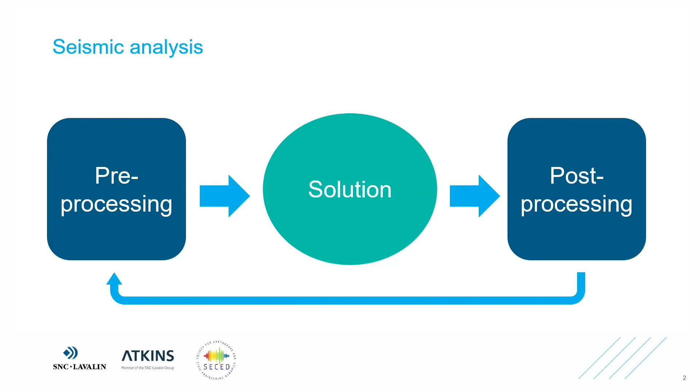Finally, if we then find something is not quite right in the post-processing stage, we might have to go back to the pre-processing stage and redo the whole analysis. But that's another topic. So what is post-processing then?

Well, typically, what we aim to do with post-processing is to extract action effects. And what do I mean by action effects? Well, I mean anything that is an effect of the static or seismic actions that we have applied to the structure, such as displacements, internal forces, stresses, reactions, and so on.

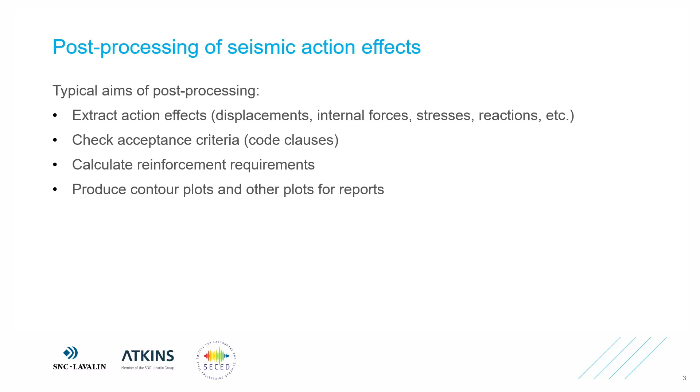You might want to check acceptance criteria. So often we refer to code clauses, for example, Eurocodes, to check if those action effects that we've extracted are within the permissible limits. We might want to calculate reinforcement requirements for reinforced concrete structures. We might want to produce contour plots or other plots for our reports, extract data for validation purposes, and compute in-structure response spectra for qualification of plant and equipment.

And in this presentation tonight, I'll focus on these two bullet points I've just highlighted on the screen, acceptance criteria and in-structure response spectra, as I think they're the most interesting. So in the first part of the presentation, I'm going to talk about how we go about checking those acceptance criteria. And then in the second part, I will talk about in-structure response spectra.

This whole presentation, incidentally, is based on a presentation I gave not long ago internally within Atkins, which was more aimed to be a training seminar for our younger and more junior engineers in the company. I've beefed it up a little bit, however, and I'm providing a few additional perspectives. So hopefully it'll be of more general interest for everyone in the audience.

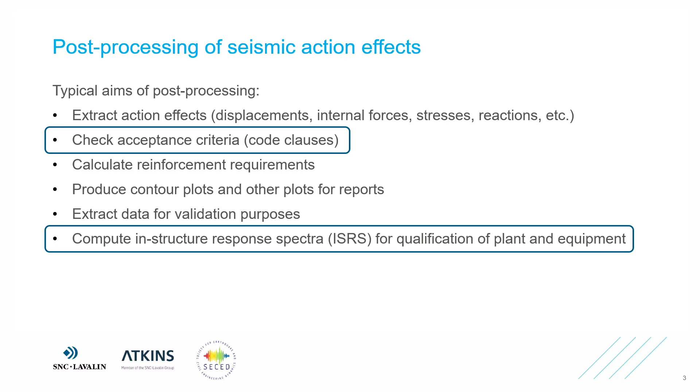Okay, so acceptance criteria. Well, I've put here on the screen two very typical acceptance criteria, which you might recognize. The first one verifies that the design bending moment is less than the bending moment resistance. And the second one verifies that the design shear force is less than the shear resistance. And I think both of these examples are taken from Eurocode 3.

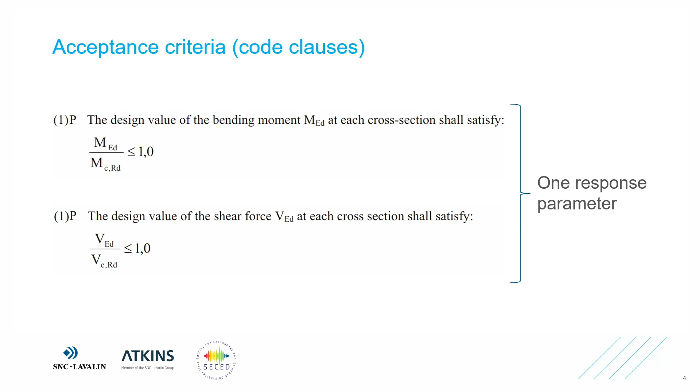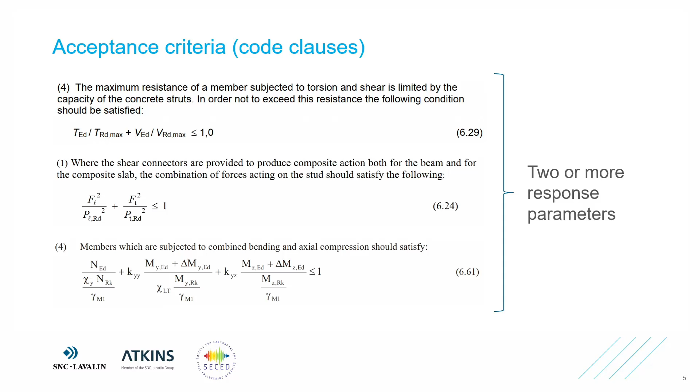And each example really only considers one response parameter: in the first case, bending moment, and in the second case, shear force. However, we also have acceptance criteria that involve two or more response parameters or action effects. For example, the first one on the screen is a check of combined torsion and shear. The second one applies to the forces within a shear stud. And the third one applies to the combined effects of axial force and biaxial bending moments in a steel column or steel beam.

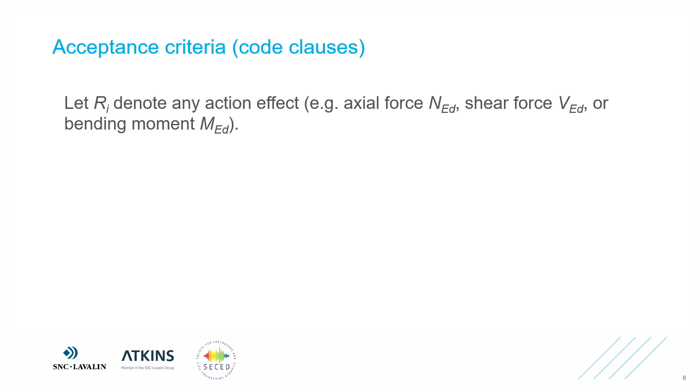Now, all these acceptance criteria had something in common, and I'm going to draw out now what they have in common. It will involve a little bit of math, but hopefully it won't be too taxing. So by R, I denote any action effect. It could be axial force, shear force, or bending moment. Then for M coincident action effects or response parameters, a generalized acceptance criterion is, as you can see on the screen, a tidy little mathematical equation.

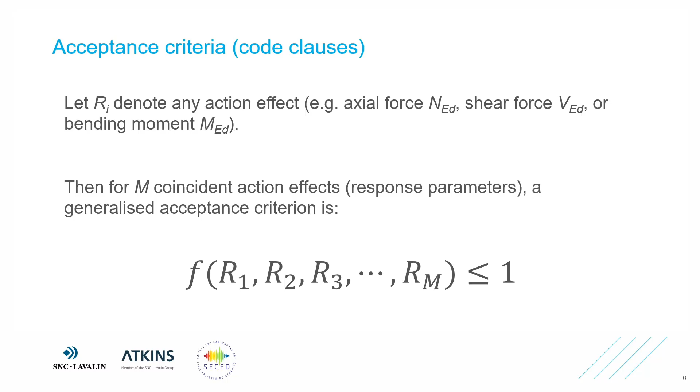We have a function of our response parameters, and that function, generally speaking, has to be less than or equal to 1. And quite often by the function f, we understand the utilization ratio, or some people prefer to call it a utilization factor. So if our utilization ratio is less than 1, we're happy. If it exceeds 1, then we have a problem, and we may have to go back and re-examine the design, or beef up the design if it's an existing structure.

But what do I understand by coincident? Well, it has several meanings, and we're not always clear what we mean when we talk about coincident. It could be that the response parameters or action effects are coincident in time. They could be coincident in space, or they could even be coincident in load combination, for example, seismic actions occurring at the same time as other actions such as wind or snow. And it's quite easy to verify that it's conservative, and often a lot easier, to check bounding non-coincident action effects as if they were coincident.

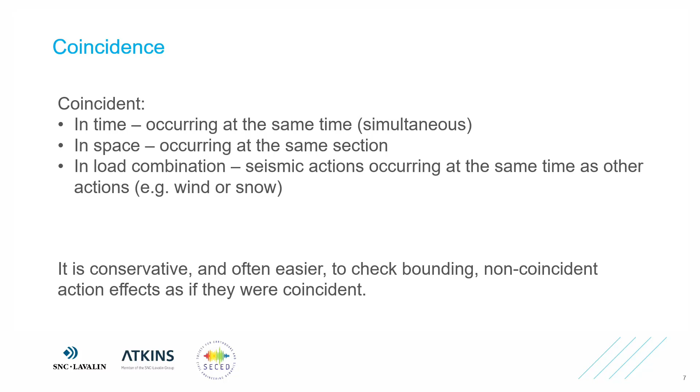But of course, it's not always in the interest of economy to do so, and we may find that we have problems if we go down this conservative route, and therefore it's of interest to know what we can do to reduce the conservatism in our approach.

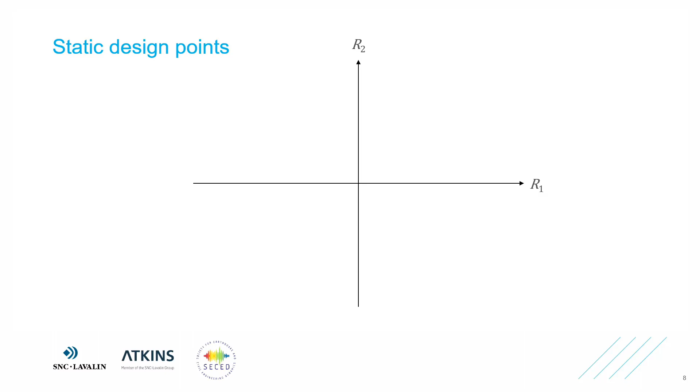Now, consider two action effects, R1, R2. As I said, they could be bending moments, it could be axial force, it could be stress, it could be displacement. And consider now that these two action effects are acting at the same location, they're coincident in space, and they are interacting. Then for each section of interest, we can plot our acceptance criterion on this two-dimensional chart.

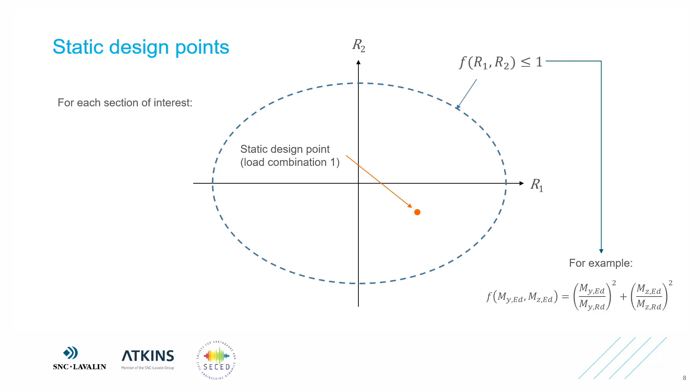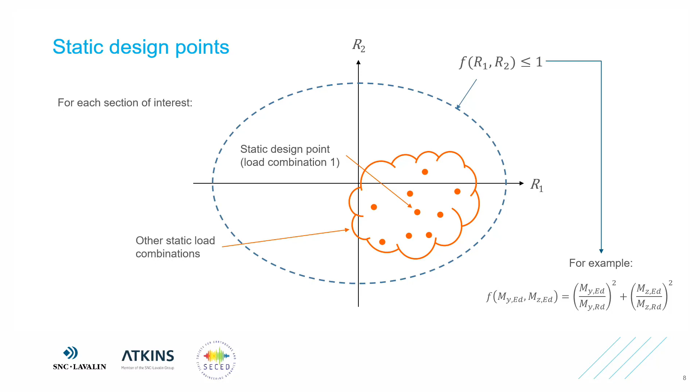Then I can plot my static design point on this chart, and that would just be a single point. And that is the result of self-weight, of wind, of live loads, etc. But I may have multiple static load combinations. I may have different values of static loads, snow, wind, different values of live loads or variable actions, as Eurocode calls them, and so on. So I can have multiple static load combinations. But for the purpose of this presentation, let's just for the time being assume that we only have one static design point, one static load combination to consider.

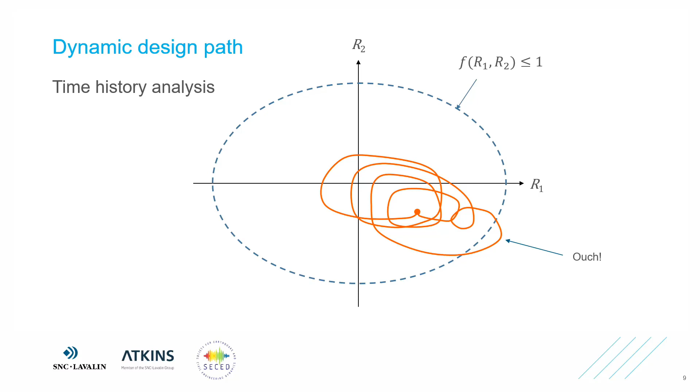Now, what happens in an earthquake is everything is nice and still. The earthquake comes along and suddenly things begin to move. And I can represent this movement, this dynamic behavior, by letting my point wobble about, as just shown there. And that point now, during the earthquake, in a time history analysis, will describe a path in my two-dimensional coordinate system. And that path may, or may not, venture outside the envelope of my acceptance criterion. And if it does, we are, generally speaking, not happy. But if that path stays within the envelope, generally speaking, we are happy.

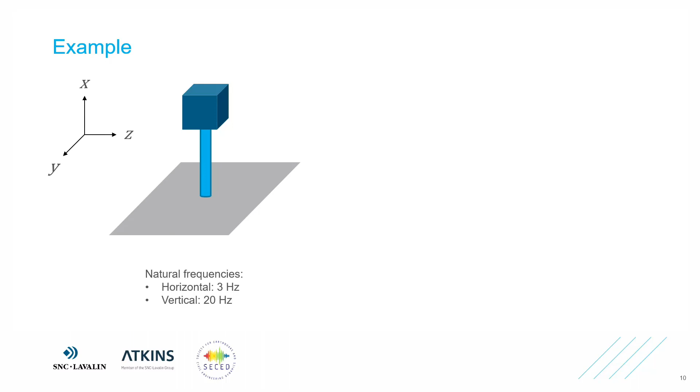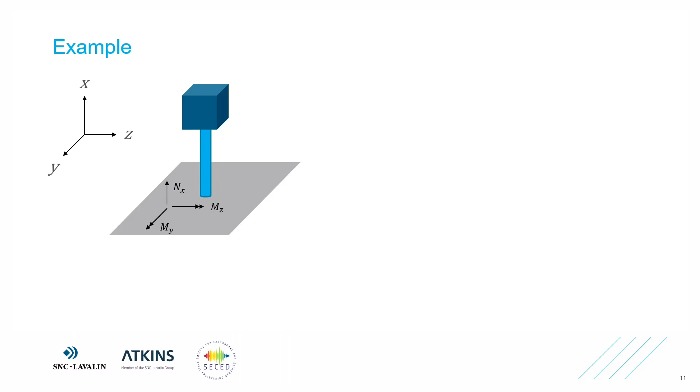I do my analysis. Let's say I'm interested in axial force and bending moments at the base of that cantilever. And I extract those action effects from the time history analysis. And again, I get time histories that have a different frequency content, because the input motion has now been filtered through this system.

What I can say then is, this is in principle all the information I need to check my bending moments and the axial force at the base of this cantilever. But I have to check each instant in time. And actually, for reasons I won't go into here, I also typically have to run multiple time histories. So when I do analysis of structures that have more degrees of freedom, larger models than the one you see here, this can become quite a data-intensive analysis.

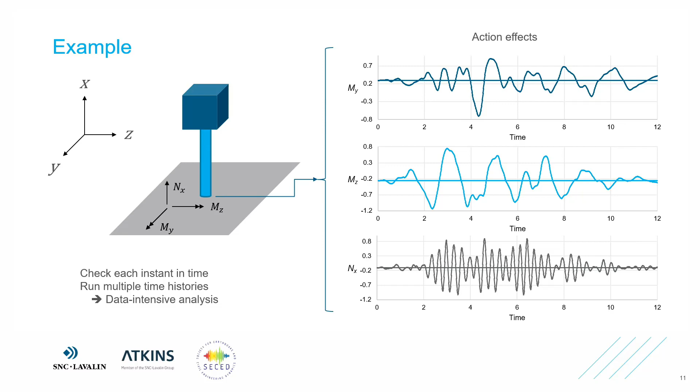Aha, someone says, why do we bother running the full analysis in time? Why do we bother with all these points in time when we could just consider the peak action effects? And that is true. From time histories, we could just extract the peaks and dispense with the rest. And response spectrum analysis indeed gives us peak action effects, and so does equivalent static analysis.

However, there are now 2 problems. One is that we lose the sign. And remember how I said earlier, we don't actually know if the peak excitation is positive or negative. In principle, it could be positive or negative. So the sign on the input motions is undetermined in principle. And so therefore the sign of the output, the action effects, is also undetermined.

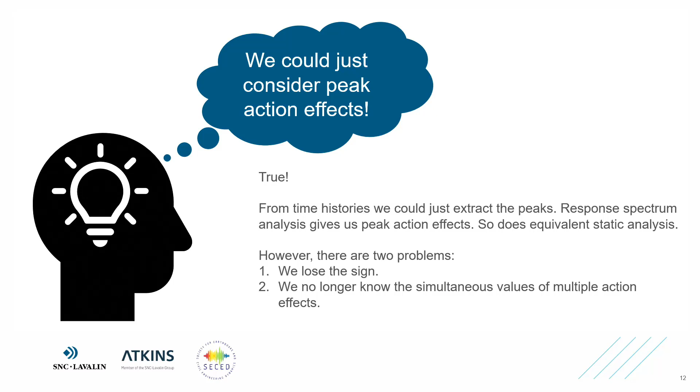And moreover, we no longer know the simultaneous value of multiple action effects. So let's explore this in greater detail. First, we need some rules, though.

And rule number 1 is that seismic action effects are fully reversible. As I said earlier, each action effect could be positive or negative. And therefore, we always have to check 2 fundamental load combinations: static plus seismic and static minus seismic. And I think that's a principle that is well known to everyone.

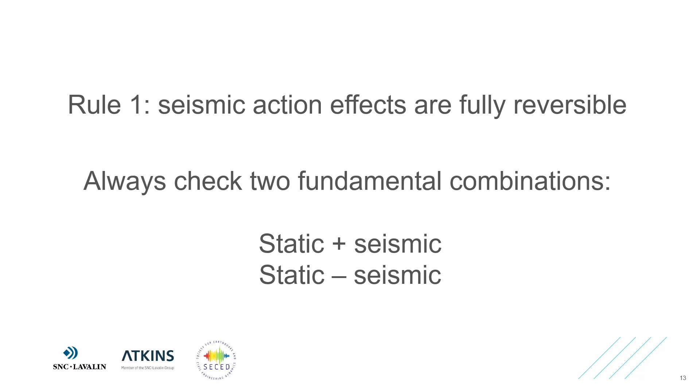Rule number 2, orthogonal seismic actions are uncorrelated. And that is actually a rule that is not, strictly speaking, 100% true. If you do analysis of lots of recorded earthquake motions, you will find that there is some correlation between different directions. But typically you can always determine two principal directions in the horizontal motions that are uncorrelated.

But design codes such as Eurocode 8 and ASCE 4 will let us treat orthogonal horizontal actions, and indeed also the vertical component, as being completely uncorrelated. And again, with the help of a little bit of math, we can understand this better.

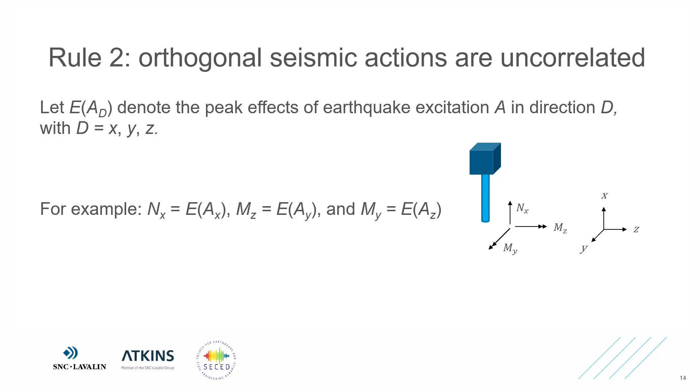So if we let E of AD denote the peak action effect of earthquake excitation A in direction D, with D being X, Y, or Z. For example, in the case of the cantilever, the axial force was an effect of earthquake motion in the vertical direction, the X direction in this case. The moment about the Z-axis was an effect of excitation in the Y direction, and so on.

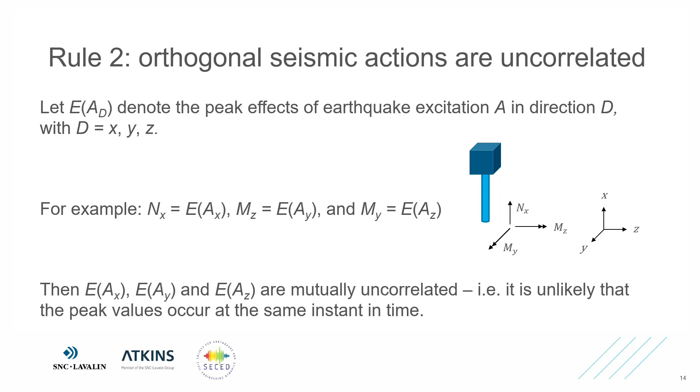Then those effects are also mutually uncorrelated. In other words, it's unlikely that the peak values occur at the same instant in time. Let's go back to those time histories that we extracted from the time history analysis of the cantilever. And we observed that at the time T1, when the peak value of the My moment occurred, the other two action effects were at 50% and 22% respectively.

When the peak value of the Mz moment occurred, then the other two action effects were at 19% and 95%. And similar observation applies to the third moment in time, when the axial force is at its peak value. And if you look at these numbers a bit more closely, then we find that when we get a peak action effect in one direction, the other coincident action effects are typically around 40% of their peak values.

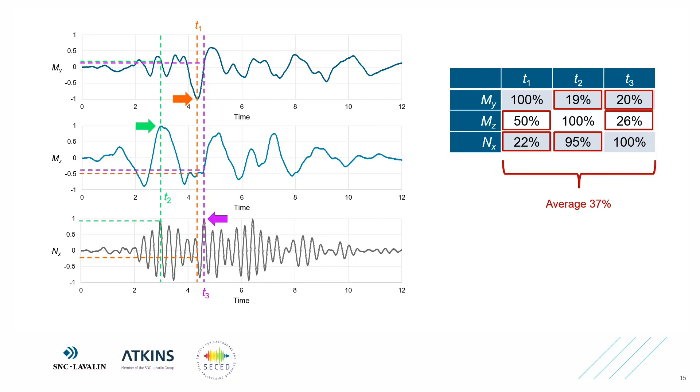And if we did plenty of these analyses and we did statistical analysis, then maybe we would find that the true value is somewhere between 40 and 30% of coincidence, of correlation, if you like. And that leads to the so-called 100-40-40 rule, which in Eurocode 8 becomes the 100-30-30 rule. And that says that we need to consider three fundamental load combinations.

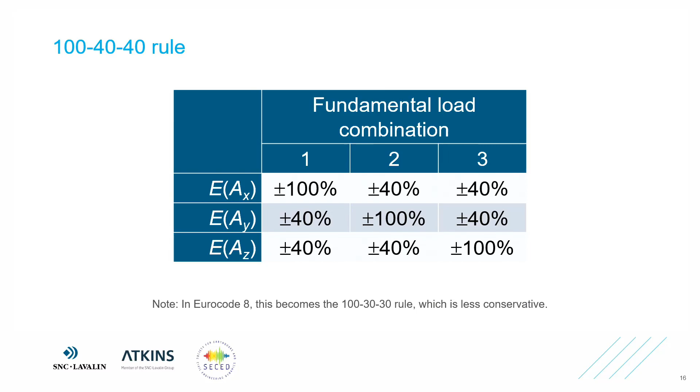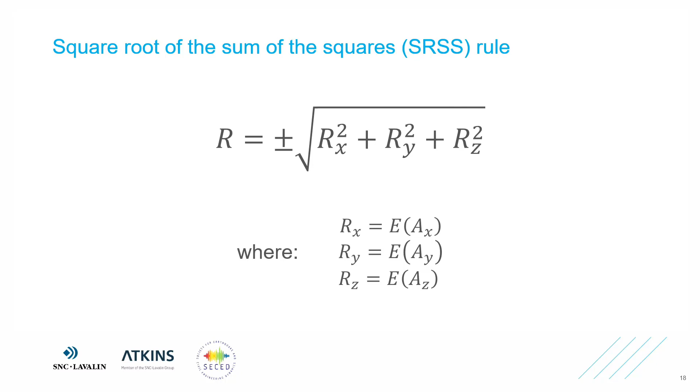We could also do a square root of the sum of the squares combination, where we simply take the peak action effect from each earthquake excitation. We square the values, we sum them up, and then we take the square root. And again, we have to consider plus or minus. And again, that rule should be familiar to everyone in the room.

And that means in the case where we have one static design point, regardless of which rule we follow, we have 2 points we need to check. We need to consider static minus the seismic component and static plus the seismic component, giving us 2 points on that line to check.

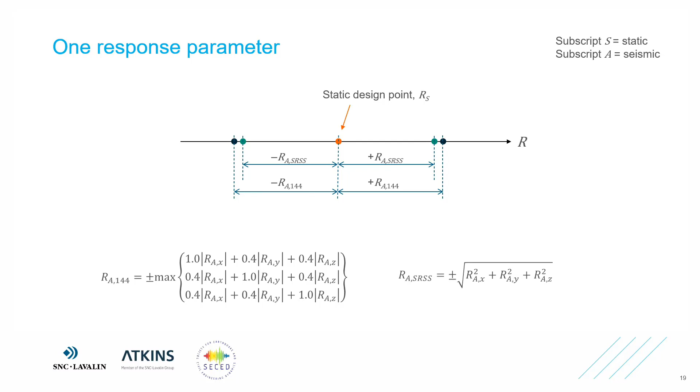So now let's turn to ASCE 4 and read more closely what it says. Well, it says, first of all, that the combination of spatial components, so that's the action effects due to excitation in different directions, should be combined using the square root of the sum of the squares or the 100-40-40 rule. And we know how to do this already. For one response parameter, it was straightforward.

Then ASCE 4 tells us when you have multiple response parameters, then the combined value of each response shall be calculated by square root of the sum of the squares or the 100-40-40 rule, and then with m response parameters of interest, we'll get 2 to the power of m sets of response combinations. And what does that mean in practice? I don't think that's crystal clear.

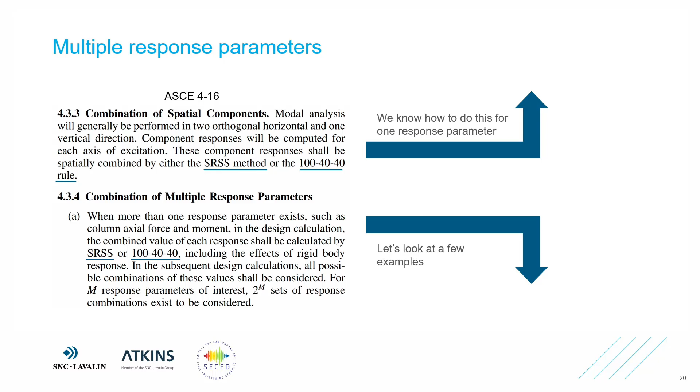And you have to read the commentary to ASCE 4 in quite a lot of detail to understand really what that means. But I'll try and explain it by looking at a few examples. Let's consider again the cantilever. We have 2 response parameters. We have bending moment about the y-axis and axial force in the vertical direction. Let's say the static values are 8 and -5. This is just an example, so the units don't really matter.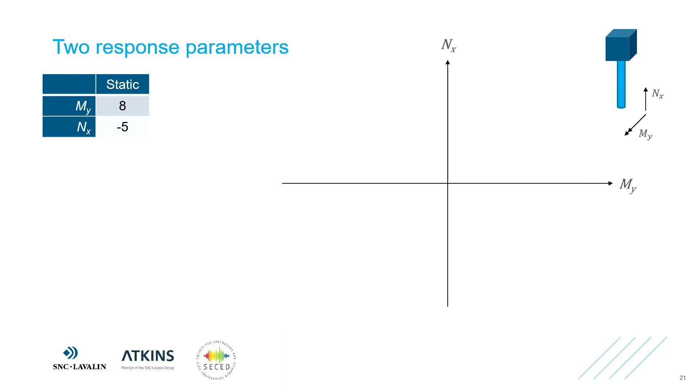We generate our 2-dimensional chart. We plot the static design point on that chart. And then we do the seismic analysis, and we find that the seismic bending moment is 15, the seismic axial force is 10, and they are due to excitation in the z direction and the x direction respectively. We do our 100-40-40 combinations. So first we do static plus 0.4 times E of AX and then plus 1 times E of AZ, and that gives us point 1. Then we do the next combination, and that gives us point 2 on the chart.

And we keep going, considering all possible permutations of plus and minus and 0.4 and 1, until we've generated 8 points on this chart. And we can connect all those 8 points, and then we have what I would call a design envelope. So in principle, Nx and My can assume all the values on that envelope, but in practice we are only interested in the vertices, the points that are numbered on the chart. I can also do what I would call a rectangular combination, which looks like a rectangle in 2-dimensional space, just by assuming that each action effect is at 100% and then doing the required sign combinations.

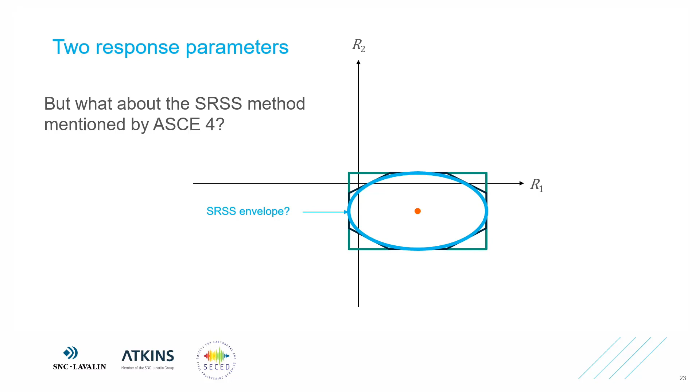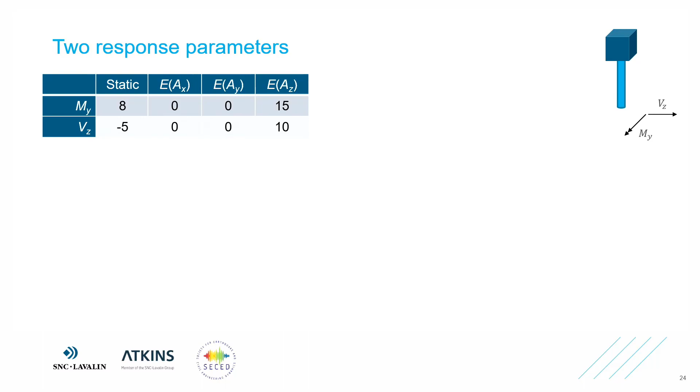But what about the square root of the sum of the squares method for combining multiple response parameters mentioned by ASCE 4? Is that an ellipse, as shown there on the screen? Well, the answer is no. And I'm going to give you just one example to show you why it isn't. Consider now again the same cantilever, and consider shear force in the z direction and bending moment about the y direction. These 2 action effects are both due to excitation in the z direction. And let's say their values are 15 and 10.

Again, we draw our interaction diagram. We put in the static design point. We do all our 100-40-40 combinations. In this case, we only have E of AZ to consider. The other 2, E of AX and E of AY, are both 0. So straight away, we can get rid of the ones that are clearly bounded by the others. We can get rid of 3, 4, 7, and 8.

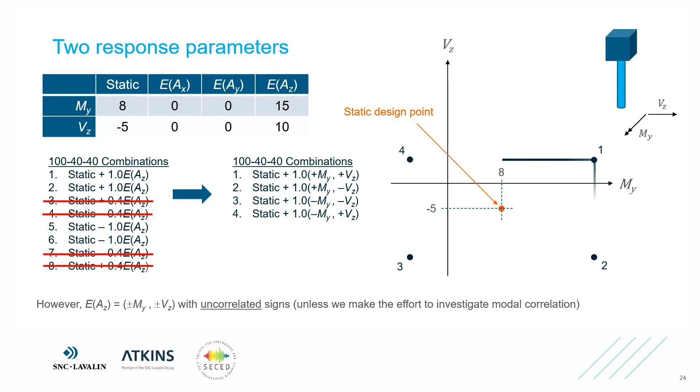However, E of AZ has 2 components, both of which could have an uncorrelated sign in principle, unless we make the effort to investigate modal correlation. So that means we, in fact, still have 4 points to consider or to check. And that becomes our 100-40-40 envelope, and the rectangular envelope is coincident with that.

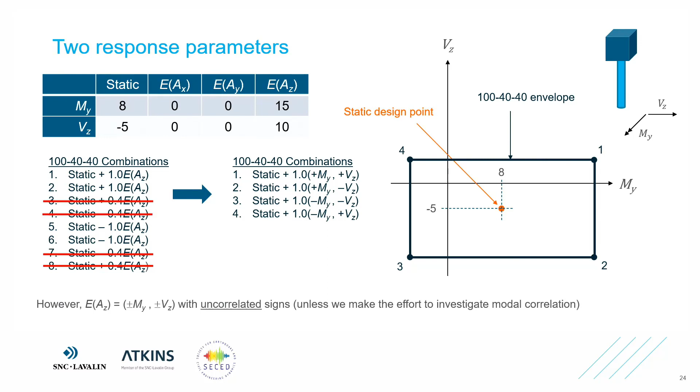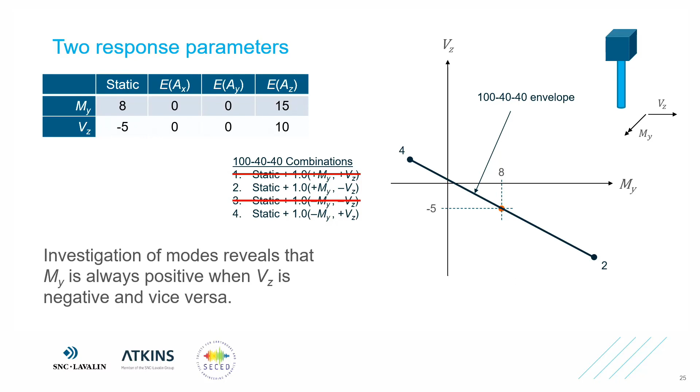But it doesn't take much effort to investigate the modes of a simple cantilever. And if we do that, we find that in every mode of response, the bending moment is always positive when the shear force is negative, and vice versa, which doesn't come really as a surprise. So we can get rid of 1 and 3 of those 100-40-40 combinations which are not physically viable, and that means that our 100-40-40 envelope now collapses to a line, and we only have 2 points to check. Now, if we were to draw the presumed square root of the sum of the squares envelope on that chart, it would clearly be unconservative.

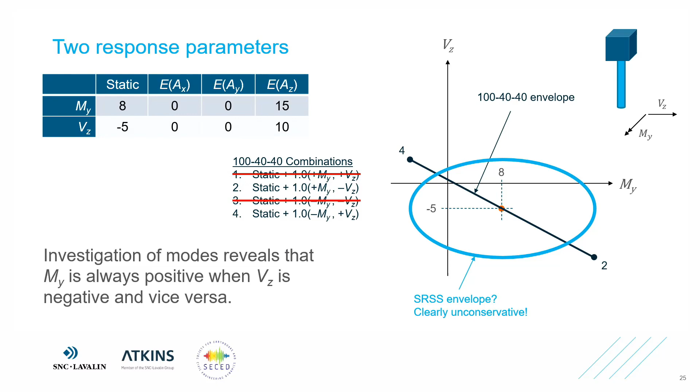So this little example shows what I don't intend to prove in this lecture, but instead just postulate, namely that the combination of multiple response parameters is inseparable from the combination of spatial components. In other words, you can't first do the combination of spatial components using one rule, say 100-40-40 or square root of the sum of squares, and then subsequently apply another rule or even the same rule twice to the combination of multiple response parameters. It's essentially one and the same operation.

And the square root of the sum of the squares rule for combination of spatial components and multiple response parameters is the same method. In other words, the rectangular envelope is the square root of the sum of the squares rule.

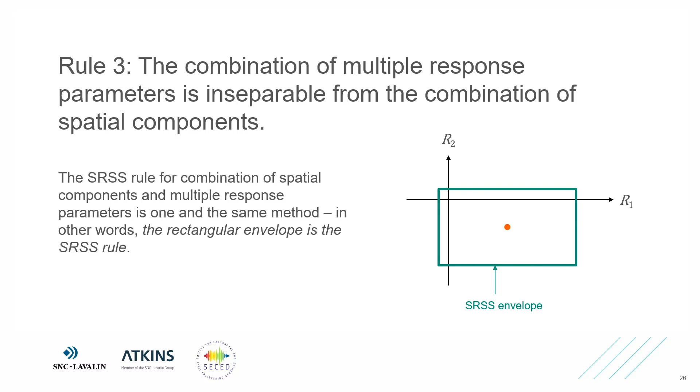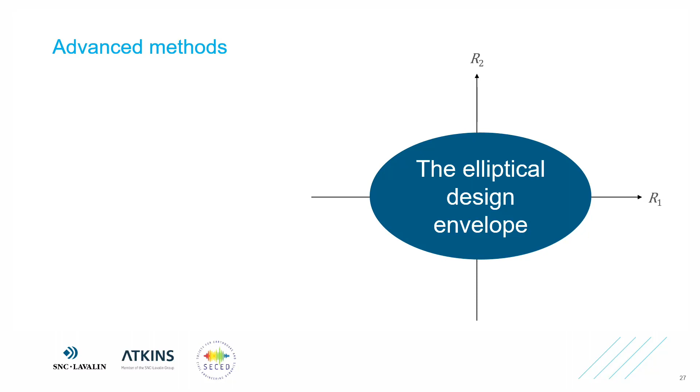So that still should hopefully be basic, but I don't think it's crystal clear from ASCE 4. Then there is something, however, called the elliptical design envelope, which would allow us to draw an ellipse on this interaction diagram. And for more than 2 design parameters, if we have 3 or more interacting response parameters, this ellipse becomes a hyperellipse in m-dimensional space. And this method is described in at least 3 papers that I know of, which are given here on the screen.

Hopefully, if you're interested, you can view the presentation in your own time. You're also welcome to contact me, and I can provide the references. Of those listed on the screen, I think 2 probably is the most comprehensive, and probably, for me at least, since I don't speak French very well, the easiest to understand.

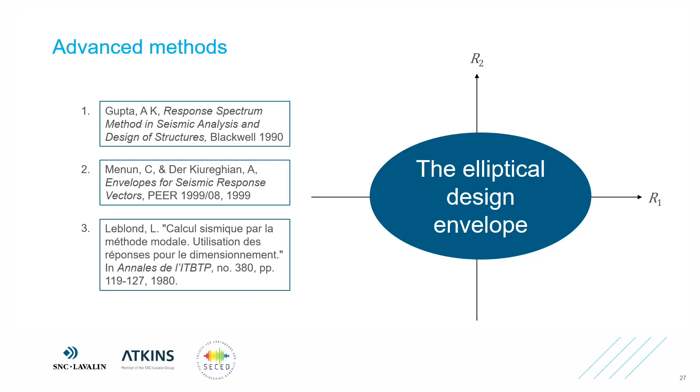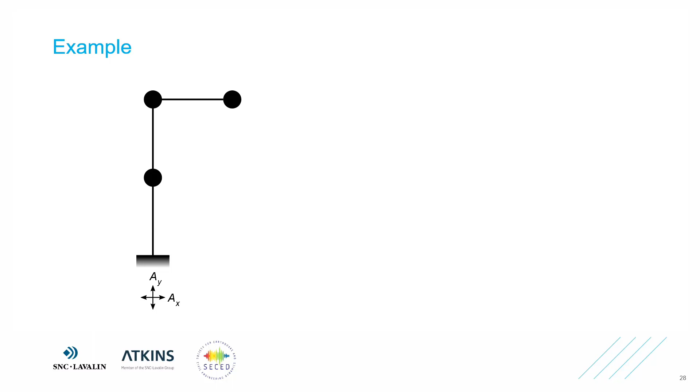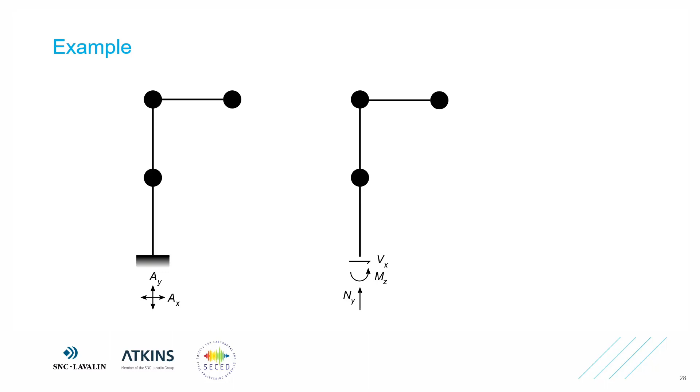Let's consider another example, a cantilever shaped like the Greek letter gamma. Let's assume that this cantilever is subjected to 2 orthogonal motions, one in the vertical direction and one in the horizontal direction. I have 3 load effects at the base of the cantilever: shear force, bending moment, and axial force. For now, I just ignore the static analysis. It's fairly straightforward. And I just do the seismic analysis, and I extract these load effects or action effects. And again, the units are not important. But it is a real example, by the way.

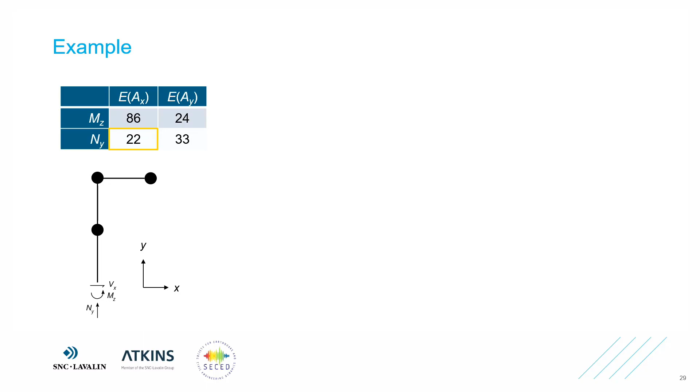And straight away, I noticed something interesting, namely that excitation in the horizontal direction produces an axial force in the vertical direction. This I would not have picked up had I done an equivalent static analysis. So that's interesting. And I can then generate my design envelopes, and I'm not going to go through the math of doing this, but they're shown here on the screen. And I note that actually in this case, the 100-40-40 rule is no longer the most economical. It's slightly more conservative, it would appear, than the square root of the sum of the squares.

And I've also shown there the elliptical design envelope, and it's clear that that is, first of all, bounded by the square root of the sum of the squares method, and it gives us considerable savings in that it cuts off the corners of the square root of the sum of the squares. So it's interesting. Definitely something that's worth pursuing if we find it difficult to justify our design or an existing structure using the square root of the sum of the squares, or 100-40-40.

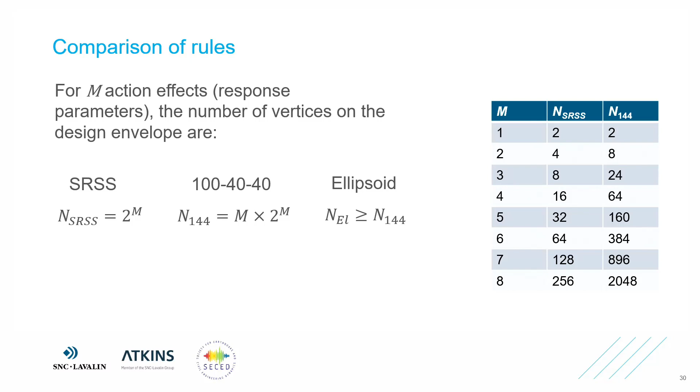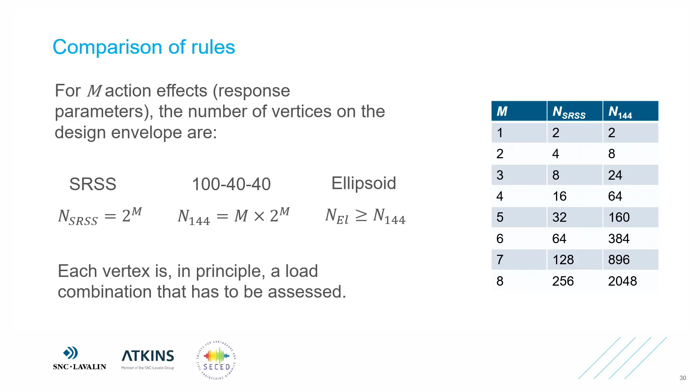However, a little bit of math, I won't have much more in the presentation, I promise, but we learned then that the number of vertices on the design envelopes relate to the number of response parameters, m, according to these equations here. And for the ellipsoid principle, we have an infinite number of points to check, but in practice it can be reduced to a finite number, of course. And for more than 3 coincident action effects, we generate quite a few points. And when it then comes to assessing those points, we rarely have any option but to try to automate the task, get a computer to do it. In other words, write a script that can do the work for us.

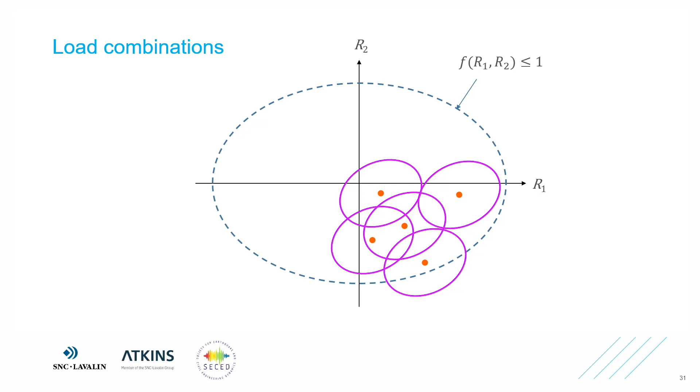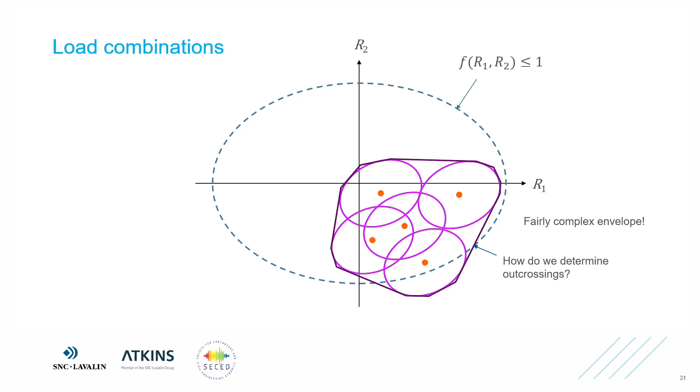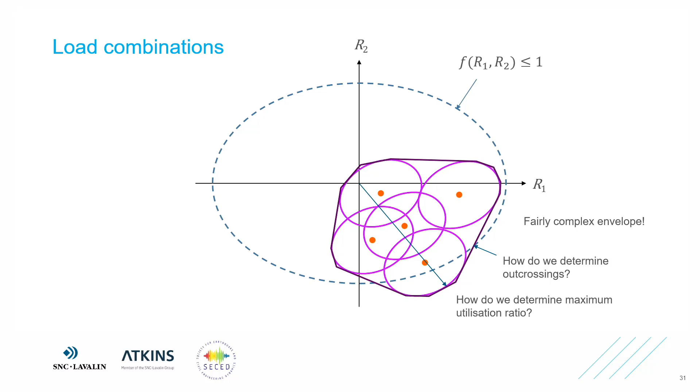Let's now consider the case where we have 5 static load combinations, and each of those static load combinations is associated with an ellipse. And we can see that the envelope of those ellipses is a fairly complex envelope of irregular shape. It's no longer described by a neat mathematical equation. How do we determine the outcrossings? How do we determine when that envelope is no longer bounded by the acceptance criterion? And how do we determine maximum utilization ratio? Well, those become questions that can only be answered through fairly complex math. And I'll come back to that math in a second.

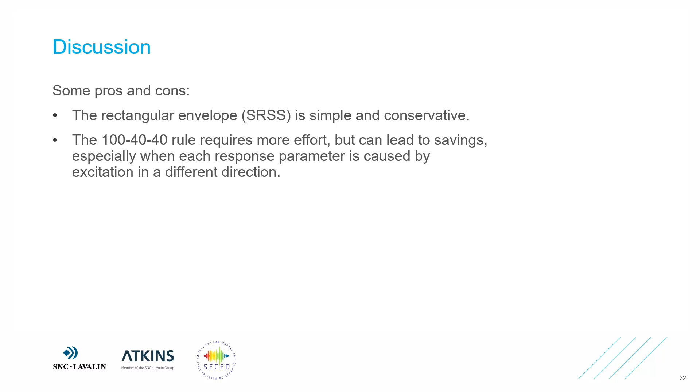But just summing up this discussion, some pros and cons of these methods. Well, we've seen that the rectangular envelope is simple and conservative. We need to put a little bit more effort into it if we apply the 100-40-40 rule. But it can lead to savings, especially when each response parameter is caused by excitation in a different direction. The elliptical envelope requires significant effort.

And indeed, you need to write your own scripts if you are going to do it. You cannot rely on existing software such as Abaqus or ANSYS to do it for you. But it can lead to substantial savings in design. However, due to the complex math that I've just tried to outline for you, it's debatable if the method is really any simpler than the time history analysis we started out with. The scripts required to evaluate the required load combinations become highly complex, leading to what I would call black box conditions.

So if we have the two methods here, time history analysis and response spectrum analysis, at the end of the day, which one is more transparent then? Well, I would argue that it's time history analysis, especially if we go down the route of applying elliptical design envelopes to response spectrum analysis.

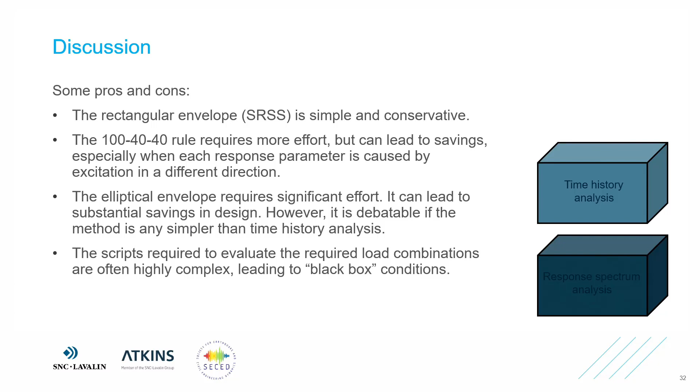And that leads us back to the, by now, rather mature question that has been posed several times, namely, is it time then to retire the response spectrum analysis method and just do time history analysis, if after all, at the end of the day, that is simpler? So I'll leave that question with you.

And then I'll go on to talk about the second topic of tonight, which is in-structure response spectra. And here I don't propose to go through the same fundamentals as I did with the post-processing of multiple action effects. I'm going to take a more general view in this second part of the presentation.

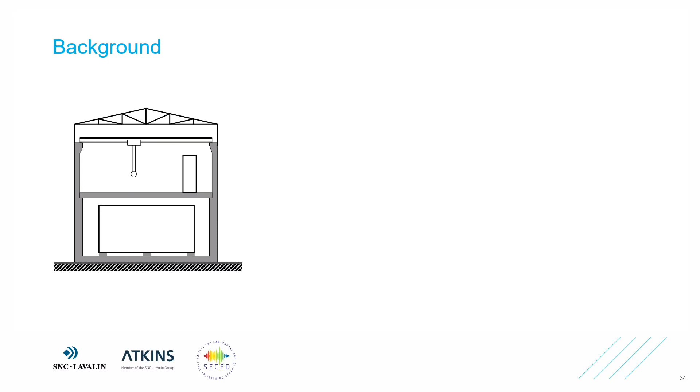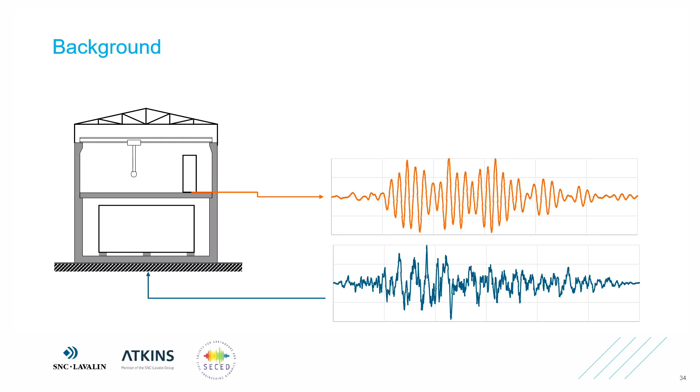Now, just to summarize, just to refresh our memories, what is an in-structure response spectrum? Well, consider, for example, we have a structure, and at the base of that structure, we have some input motion, an earthquake excitation. The structure responds, it vibrates, and then we can extract the motion within the structure at a point where we may have some equipment, for example, and the equipment may or may not be modeled explicitly. In most cases, it won't be modeled explicitly. In most cases, we'll just have some additional mass that allows for the mass of the equipment.

But that in-structure motion, the orange line there, we can then turn into an in-structure response spectrum. And then we can take that in-structure response spectrum and hand it over to the designers or the suppliers of that equipment and say, here you go, this is what this equipment has to withstand to fulfill its functions at this particular point in the structure.

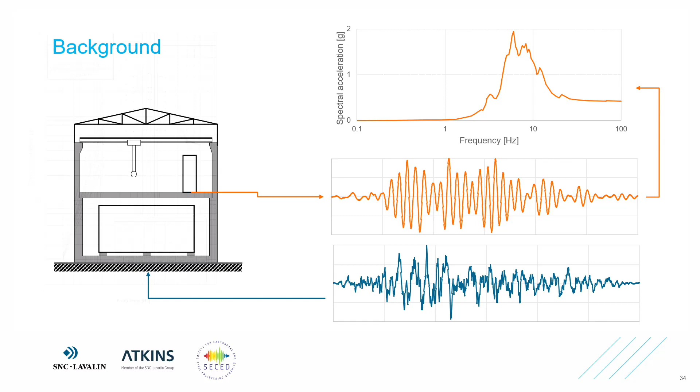All well and good. And in my time in the nuclear industry, I've seen multiple in-structure response spectra, and they typically look like the ones you see on the screen. Just a few examples from a great number of plots I've seen over the years.

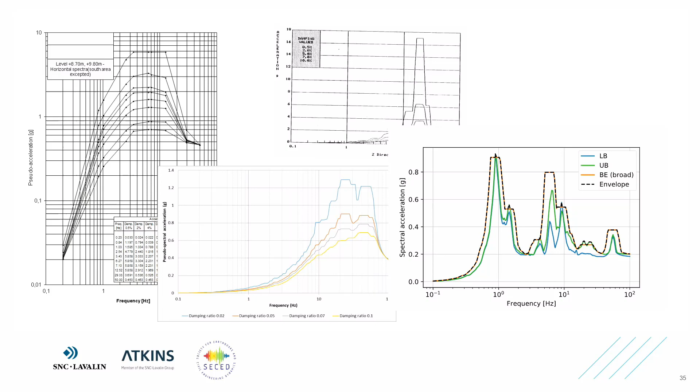Very often what is of interest is the peak spectral acceleration or the zero period acceleration, which are commonly shown on contour plots. And that gives us a heat map of the response of the structure. And it perhaps tells us where we can put equipment and where we should rather avoid putting equipment.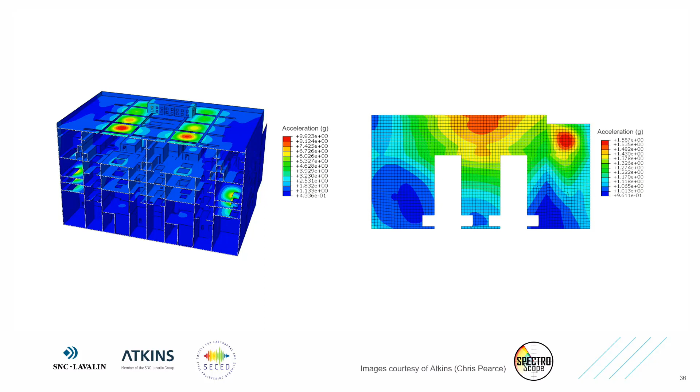But there are some challenges, admittedly. First of all, our in-structure response spectra are sensitive to modeling. I'll show an example later on, but this is what we find. If we tweak the model a little bit, often we can get quite dramatically different results. They're sensitive to damping, and they are also sensitive to coupling between primary structure and secondary equipment at tuned frequencies. By tuned frequencies, I'll explain what I mean later on.

And that means, as I hope to show in the remainder of this presentation, that in-structure response spectra typically have a much lower annual probability of exceedance than the free field input motion. In other words, they are much more conservative.

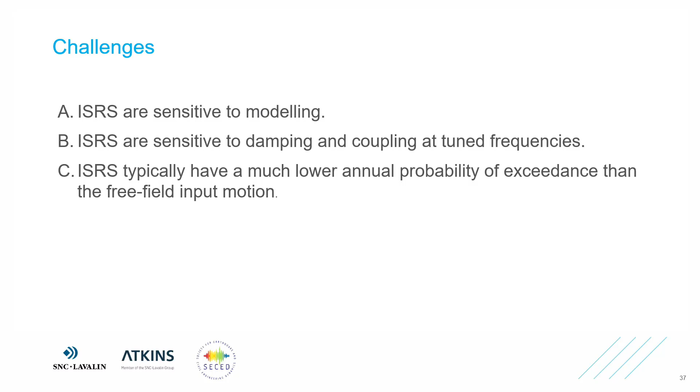Now, model sensitivity. Here's a real example from a real site somewhere in the UK, the details of which I cannot divulge in this presentation, but nevertheless, this facility has been analyzed twice, first around 1990 and secondly around 2012. And in 1990, obviously computer power wasn't as advanced as it is today, so the analysts quite sensibly chose to construct a stick model. And this stick model had, from memory, and I'm pretty sure this is correct, 54 degrees of freedom in total.

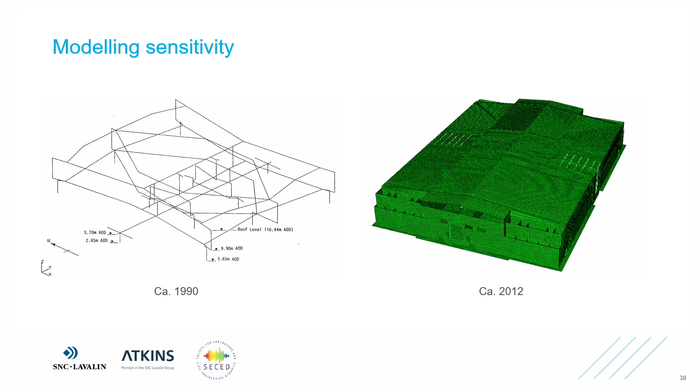Fast forward to 2012, and computing power has advanced tremendously. We are now able to build large, detailed models using shell elements. And this model on the right from 2012 probably has hundreds of thousands of degrees of freedom. A vastly more sophisticated model.

And what we see then, when we compare the in-structure response spectra predicted by the two models on the same chart, is that they look completely different. So the 1990 model had a dominant mode around 20 Hertz, which produced a very significant peak, as you can see there, at that frequency. The 2012 model had no such dominant mode. It had a multiple of local modes, but no dominant overall sway mode. And the peak you see on the chart is in fact largely due to soil structure interaction, not due to structural response at this particular point in the building. So the two are vastly different.

And that leads one to speculate, well, what would happen if we try to analyze this structure again here in 2022, using perhaps even more detail, even more refined modeling? Would we get a third answer that's completely different? At what point do we converge to a single answer? At which point do we gain confidence in our model to predict the right answer for in-structure response spectra? It should be noted that between 1990 and 2012, no new physical information had come to light. These two models were built on the same ground investigation, the same geotechnical parameters, the same knowledge we have today even of the stiffness of reinforced concrete and so on.

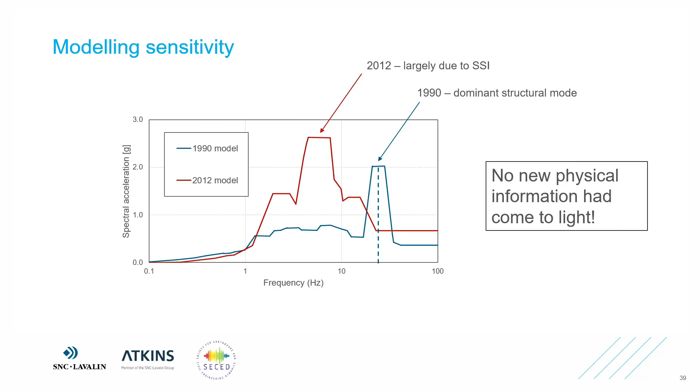Then there's the whole question of decoupling. And perhaps the chart that is now on the screen will be familiar to many of you. Again, it comes from ASCE 4, and it defines ASCE 4's criteria for dynamic coupling or dynamic decoupling. When can you assume that secondary equipment is decoupled from the response of the primary structure? When can you analyze the two separately, and when do you need to consider them together? And on the x-axis, we have the mass ratio, and on the vertical axis, the y-axis, we have the frequency ratio.

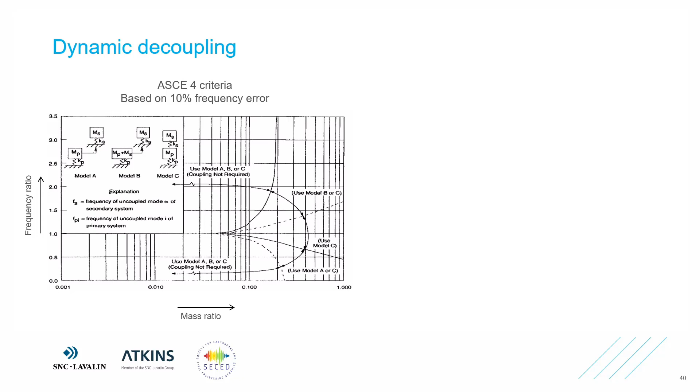However, this chart here is just based on achieving less than 10% error in frequency, in natural frequency. But actually, we're not that interested in natural frequency at the end of the day. We're interested in response. We're interested in stress and things like that. So actually, this chart here, I feel, can be a little bit misleading. Perhaps it would be more rational to use a chart that shows another parameter of response.

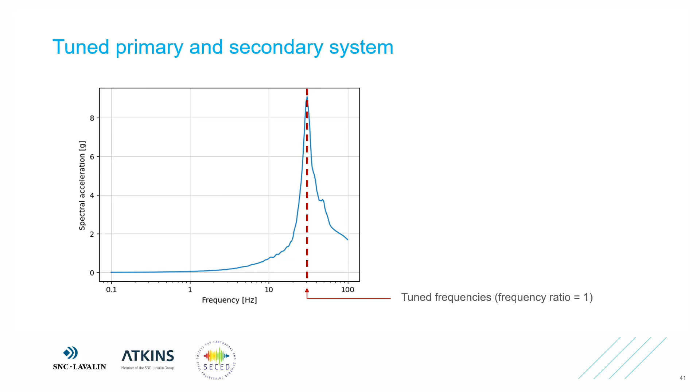But let's now again also consider this line here, which corresponds to a frequency ratio of 1. This is of particular interest in the context of in-structure response spectra, because at a frequency ratio of 1, this is exactly where the equipment is tuned to the frequency of the primary structure, and this is where we generate the peaks in our in-structure response spectra. Always the peaks in in-structure response spectra occur when the secondary system is assumed to be perfectly tuned with the frequencies of the primary structure. So that's of particular interest.

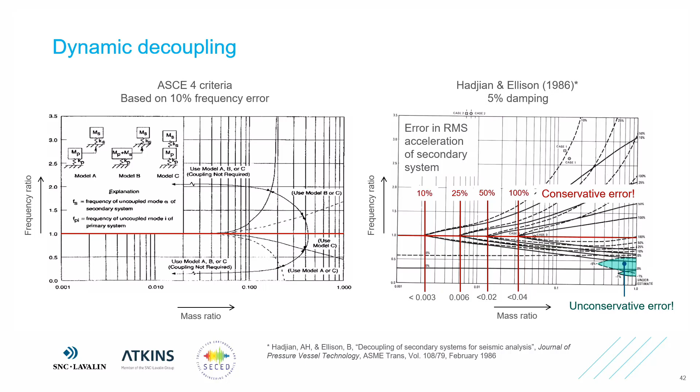Let's look at the in-structure response spectra at the center of the slab. And we see that peak now of 9 g, which occurs at the tuned frequency I mentioned earlier. And that's exactly because the slab has a natural frequency. It has sort of a bounce trampoline mode, if you like, at around 20 to 30 hertz, I think.

Okay, that's quite a lot, 9 g. I have to admit I didn't quite believe that when I saw it in the first case, but it is mathematically correct. Whereas the free field input spectrum that is applied at the base of this model only has a peak spectral acceleration of 0.7 g. So in other words, we're amplifying the input motion by a factor of 14 in this case, which is quite remarkable.

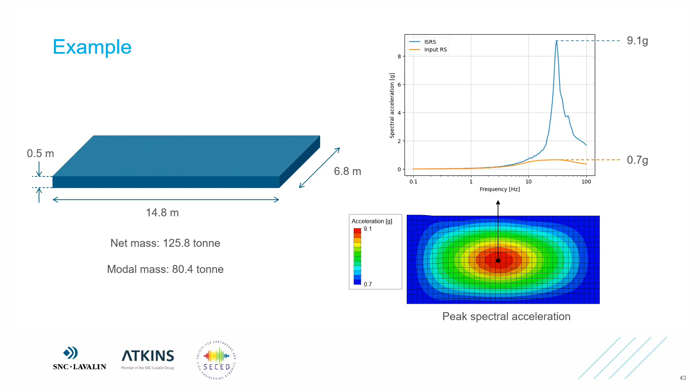Let's now actually try and put that secondary system at the center of the slab, and let's model it explicitly. So I've added this secondary system explicitly to the model, stuck in a little single degree of freedom oscillator with a mass of 0.8 tons, 800 kilograms, corresponding to a mass ratio of 1%. Normally we would wave this away and say, oh, the two are uncoupled. Surely that can't make any difference.

But it did. So when I ran the analysis with this secondary system in place, the in-structure peak spectral acceleration reduced from 9.1 g to 5.7 g, a reduction of nearly 40%, which is actually totally in line with the chart I showed you earlier. It was to be expected, actually.

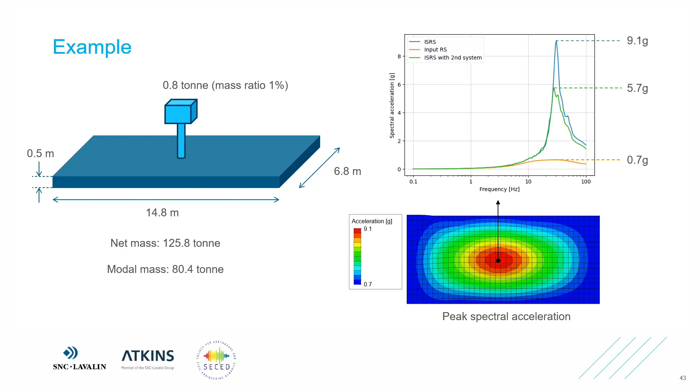So we've seen that in-structure response spectra tend to overestimate the spectral acceleration at tuned frequencies. Often these in-structure response spectra are calculated as envelopes of multiple parametric variations. So, for example, lower bound, best estimate and upper bound soil parameters. And each parametric variation has a finite probability of being true.

They're often envelopes over large areas, so typically for that slab in question, we would just produce the envelope for the whole slab, and we would assign all the equipment to that envelope, even if the equipment is located around the edges of the slab, where the spectral acceleration was a lot lower. The in-structure response spectra are often peak broadened, and sometimes if you have multiple peaks, the valleys between these peaks are filled in.

Damping is quite often underestimated, especially if you have these high accelerations. It seems incredible that we only have 2%, 4% damping in a structure like that, and often we ignore radiation damping through the soil. So all this means, and this is my key takeaway tonight, is that in-structure response spectra have a much lower probability of exceedance than the input motion.

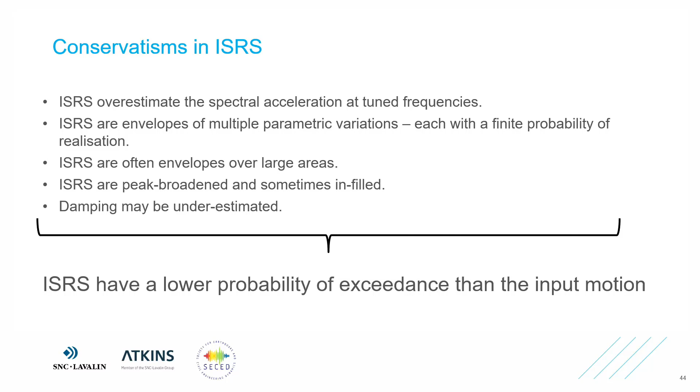Some final thoughts before I finish for tonight. We've seen that advanced scripts are required for post-processing. So nowadays, engineers, I would say, need to come out of university with skills in programming, and preferably some experience with using a programming language such as Python, if they want to have a career in this particular line of business.

However, engineering consultancies are often not set up to be software developers. Actually, if I'm honest, I think many consultancies, at least the ones I know of, are not very good at it. Things like version control, checking, documentation often seem to get lost. And if an employee leaves that had written a script, often that script becomes unusable because we have nobody to maintain the script. It's never handed over.

Seismic analysis is characterized by a dichotomy between simplicity and complexity, and conservatism and economy. However, whichever route is taken, engineers should not take leave of common sense. They should be able to interrogate models and explain the response in simple terms. Unfortunately, sometimes when I've pressed engineers to do that, they flatly refuse.

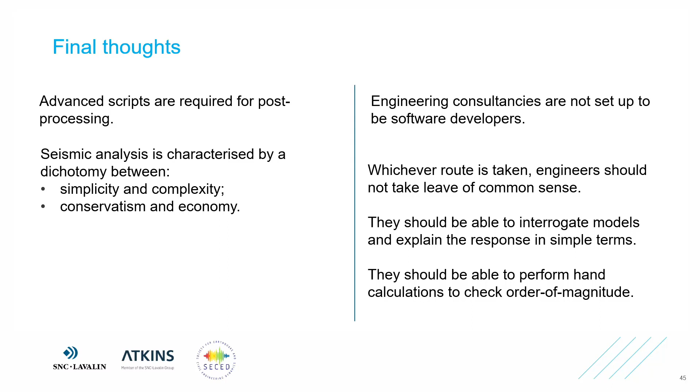Should the response spectrum method be retired? That's the question I posed earlier in the presentation, and I'm sure we'll still debate that in 5 years to come.

And finally, I think that the industry should address the conservatism in in-structure response spectra through research and development. There are methods out there that can fairly easily account for the presence of light equipment in structures. So should we make a concerted effort to implement those methods? What would it mean in terms of the number of the data we generate? How can we present that data in a reasonable manner so that it doesn't overwhelm people?

It's great. However simple these things are, you always find out more every time somebody presents these things. So thank you very much. I think you also started producing a little bit of information on the background to tuned mass dampers in terms of the 1% mass having such an effect. Yeah. Even though it wasn't modelled as damped, it was just there as a mass in just the right place. So insight all the way around. So thank you. Thank you, Ian.